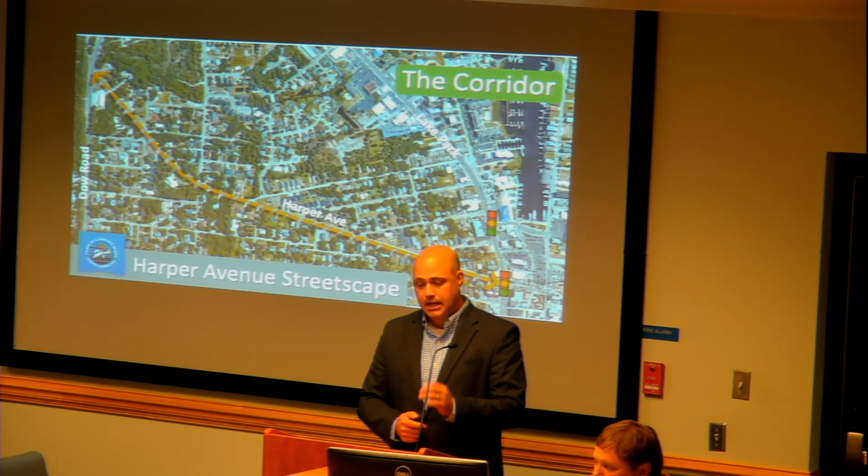So this is current information for those of you who were here on the 15th. The overall corridor, approximately 1 mile in length, has a lot of rich history associated with it, much of which we learned through the design workshop. Those are always valuable for that. Understanding the context, the impact to residents, what this corridor used to be, and what it means to the community is important. So as we go through the street design concept, we've tried to encapsulate a lot of that.

But again, it's 1 mile in length. We've got a right-of-way that varies between 90 and 100 feet. It's posted 35 miles per hour, although I'll add a caveat to that. While it is posted, a lot of people, especially on the western side of the corridor towards Dow Road, really don't drive 35 miles per hour - those speeds get up pretty high. Sidewalks are about a third of the corridor, really more towards Lake Park, and we carry about 1,522 vehicles per day. To give you a perspective, Lake Park carries about 24,000 vehicles per day.

So this corridor, while it has some high speeds through there, it's not carrying a whole lot of volume. So a lot of the recommendations we're going to show you are going to be more based in the pedestrian, bicycle, and aesthetic realm rather than the throughput of traffic.

The capacity on a typical road like that is 15,000 vehicles per day, so you're at 1/10 of that. So anything out here is not necessarily designated because of capacity reasons. There are some issues in the corridor.

We actually had a very good meeting with DOT about this issue. It's been reported to the maintenance engineer. With DOT, they're looking at it.

I think when we showed them some photographs of not only the super elevation, which you can see over here, how the road slopes into this, the depth of the water, and some of the different angles that we had, DOT quickly started to realize, I think we've got a problem here. We need to work with the town, and it's something that we'll probably have a little bit to contribute to relative to the flooding out there.

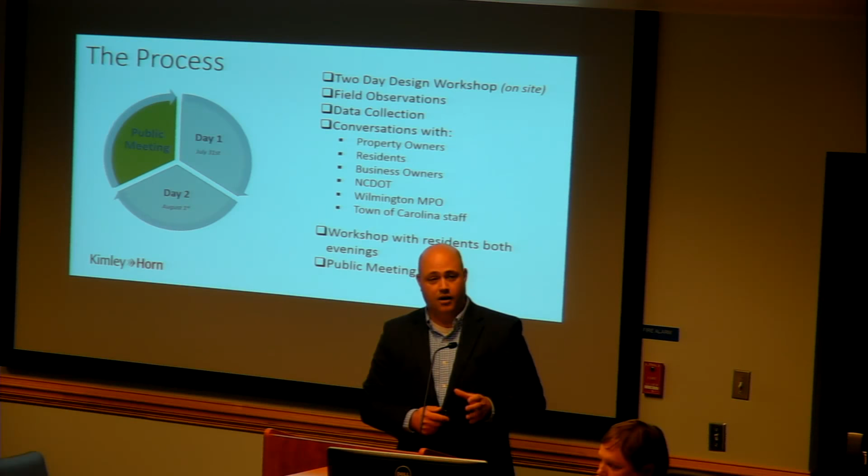So let me share just a little bit about what we heard. If you were here, we had 21 people who came the first night. We did a really cool thing: keypad polling. You got this little device, you didn't get to take home, but you got to push a bunch of numbers on it, and you got to see a lot of different information relative to that. It provided us some wonderful insight on what we needed to know about the corridor and what folks were looking for.

So we had a couple of different vision statements that were developed out of that. Everyone we talked to said Harper Avenue is a unique street. And if you look at a map, as we showed earlier, it is. It cuts across the grain, comes across at a sweeping angle which follows the corridor of the railroad track, but it strikes attention as you look at that corridor.

It's completely different. Somebody made a comment today as I was talking to them at the MPO: it's amazing, you've got 100 feet of right-of-way here, but it's not where you need the right-of-way. You actually need the right-of-way in other places. So you're blessed with that ability to do a lot with a corridor.

And it is a unique corridor in the sense of what it connects. It's really the only connection that you have, that you can make either walking or from a bicycle, that's going to connect the state park, where a lot of people stay when they come visit, and your boardwalk. Most communities don't have the ability to create a greenway that connects those elements, and so it's a very cool street from that.

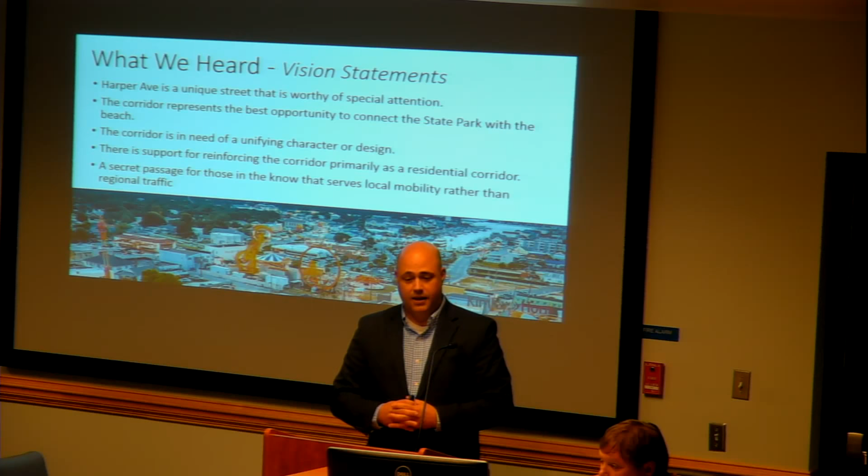It is in definite need of some improvement and a unifying character, and a lot of folks in the community have expressed that. There is strong support for this remaining a residential corridor, even though there's some commercial up towards Lake Park. The majority of it is single-family residential. Will it change? That's for the future to tell us.

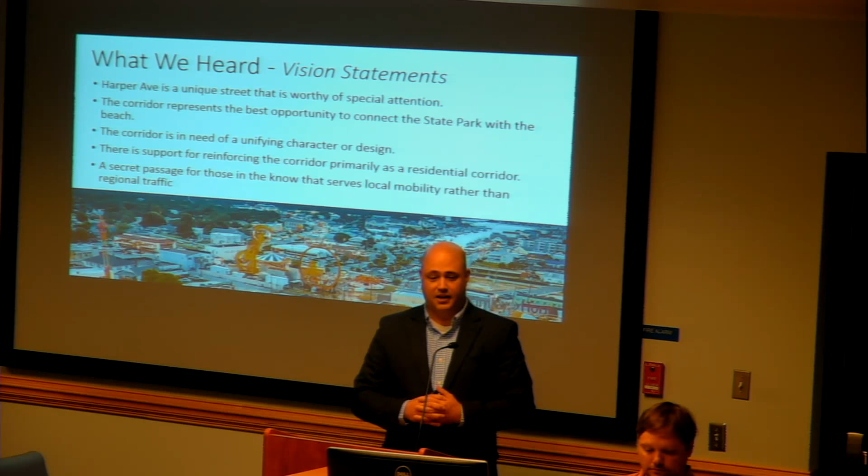And based on the traffic numbers, nobody is using this. It's sort of like the secret passage, if you will. 1,500 people per day using that is a very low number.

Parking was a big issue for folks in the corridor. We need to maintain it. You can see that you've got a combination of hotels and residential rental units, and you've got businesses in the photo up there. You can really see what's going on, that there's a lot of folks, especially in that 200 block. It begins to transition the further north you go, or further west you go, but it does have a parking impact, and people are parking out there today on the grass.

We did make a recommendation that you need to look at a parking study overall. We heard a lot of people say, how many parking spaces do you need? Not really sure, how much does the town need? We don't know. There needs to be a parking study, and I know you've looked at that a little bit, but a town-wide parking study would be key to help answer some of those questions as we begin moving forward.

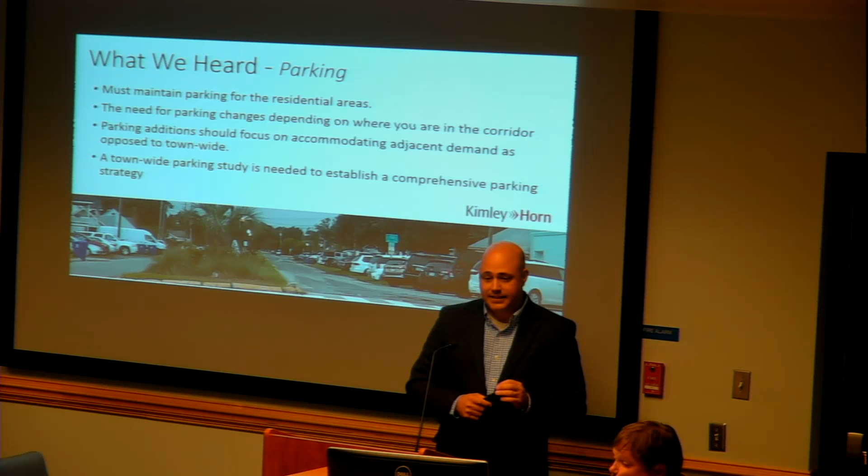Stormwater, that's a no-brainer, especially up at Dow Road, and as you start to come back down, we're starting to see a lot of that. We had a very good discussion last Thursday afternoon with town staff talking about improvements for Phase C, Phase A and Phase B, and how those are tying into this, how we will connect to that to help mitigate.

Where do we see issues? Again, we walk the corridor looking for places where we might need to connect to existing stormwater or amplify that or supplement that. So we're making recommendations moving forward with that.

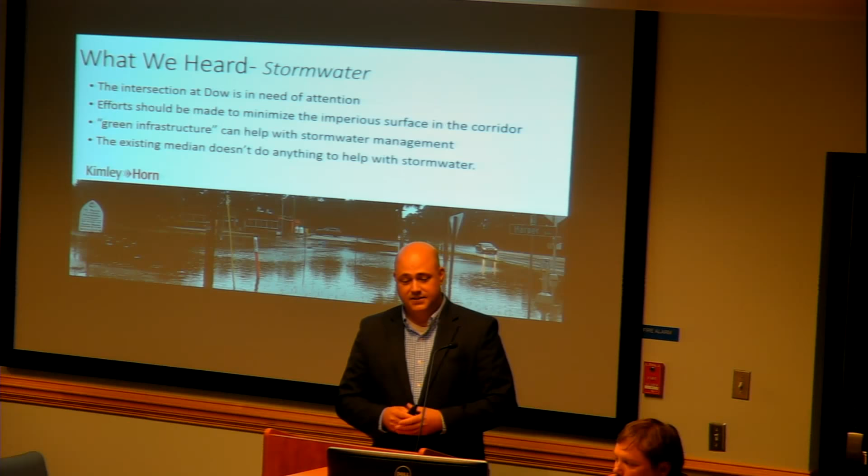And it is important to note that the existing median, as beautiful as it is, or as ugly as it is, depending on your perception, doesn't really do anything for stormwater. Water does not go up a hill and over a curb to get in there. So there's not a benefit for that from a stormwater perspective as we look at it in its current state today.

We heard a lot about green infrastructure, whether it's on the side or in the median. Everyone really likes green in this, and it's a community-wide endeavor, if you will, but it's particularly for this street. Being the only street that I am aware of that actually has a median on the island, it's a unique street. We go back to the design elements, we've talked about that.

We've had conversations, as recently as today, talking about the median. Should we keep it? Should we not? Should the median move to the side? Should it stay in the middle? The concept we've come up with retains it at this point, but in a smaller section, lengthwise for the overall corridor and widthwise. We really feel like there's value to that, and it helps improve the aesthetics of the corridor, or as a green street, not only the green of the avenue, but also the greening of folks walking and bicycling through here.

And bicycle and pedestrian, again, this is really the driving factor through here. I can't say with 100% certainty, but I would say the majority of folks indicated that they are in favor of a multi-use path connecting the corridor from the park down to the boardwalk.

Sidewalks, we heard a lot about this, folks saying, well, I know there's an existing sidewalk out there today in the 200 and 300 block, but I'm not really sure if I walk over there because it looks like someone else's yard. There's no lights over there. It's really close because it's a wide corridor. You see a lot of people walking down the middle of the street because the lights are out there. So those are some things we need to address as we go through this design and move into the overall design.

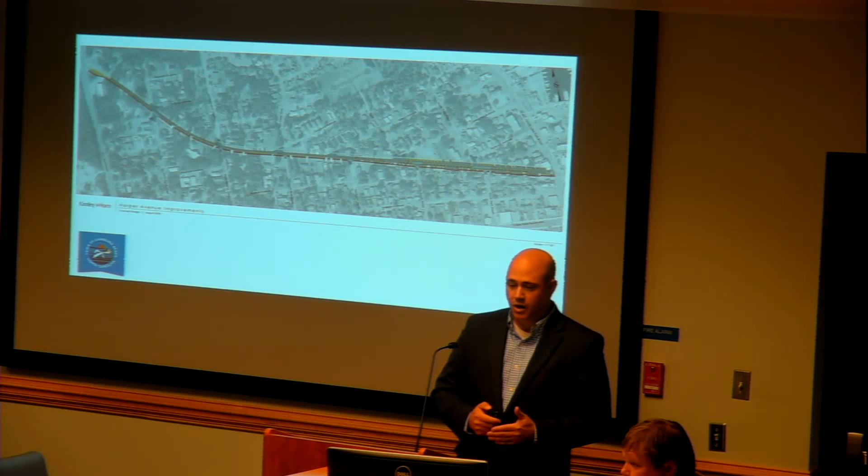So this is the overall concept, updated. I'm going to zoom in on a couple blocks just to show you what I'm talking about. The first one is Lake Park to 4th Street. And if you look up here, one of the things we heard is that folks coming from the boardwalk, as they're coming out here, you'll notice how the configuration of the lanes are today.

You've got a dedicated right turn lane, and you've got a dedicated through left. That's not a typical configuration, and with this readjustment of the street section, one of the things we've done is...

We narrowed this up a little bit. We've narrowed the lanes down. The current lanes are 15 feet, and we've narrowed those down to about 11 feet. The median width is 19 feet today, and we've narrowed that down to about 9 to 10 feet.

We're doing that so that we can bring the overall street elements in and slow traffic down. Hopefully we'd like to repost the speed limit on this section of street to 25 miles per hour. But also, with that, design influences speed.

If I kept the 15-foot travel lanes out there, I can post this at 35 miles per hour or 25 miles per hour, and I'm still going to drive 45 miles per hour. It feels wide. So we've done that.

But as we did that, you'll notice that we've changed the lanes as we come across here. Now it's a through right and a dedicated left, where the median used to come all the way up through here. We've done that so that we can shadow this on the opposite side. If we don't change this, what's going to happen is that through left is now pointing at the through movement coming out.

We've had a conversation with DOT already about this. They agree that that needs to be resolved. There's not a heavy enough volume coming in this right to keep it as an overlap.

When you look at this overlay map and you're at a 100-foot right-of-way, do we have some encroachments into the right-of-way with structures? No. Are we right up on the line on some of them? No, we're actually trying to move the impact in. One of the surprises we've shown people in the past is that we're actually zero lot line construction on a build-to on some of these older properties.

The new ice cream place on the corner, is he right on the line? We haven't got that far into it to go and survey each one of the obstructions that are there.

In those locations, we try to work around that as best we can. One other question at this point, the angled parking you've got here in the first block or so, how deep, what's the depth of those spaces? 18 feet, 20 feet? It's approximately 18 feet.

I know the feedback we've gotten is our change on Cape Fear has made it very crowded, and when you have any normal size or larger vehicle getting in and out of those parking spaces on Cape Fear, it's very dangerous right there at Lake and Cape Fear. I know you guys have all heard those comments, right? When people park a big truck, it is right there, and I just want to make sure we don't repeat that same constriction.

Great point, and you'll notice if you look at the screen, we pulled the parking back. That was one of the things that came out of our public meeting, that over at Cape Fear and Lake it's really close, you could have a car backing out, and sometimes it's backing into Lake. So we've pulled the parking back from Lake, which is over here, Lake Park, so you don't have that interference with the intersection.

You don't have the interference with the pedestrian either. Basically, as you're coming off of Lake Park and you turn to go on Harper, you've gone through the maneuver and you're driving straight before you would interact with another vehicle. That helps with sight distance at the signal, it helps with pedestrians crossing, and it helps with overall safety of vehicles moving in and out of that area.

The fact that we also have a 100-foot right-of-way in that area and we're narrowing up the median should give us enough room to expand the parking areas, so the vehicles parked there don't lap over into the travel lane like they do on Cape Fear. We've seen that on several occasions where somebody pulls in a big truck and it's sticking way out into the street. You could narrow the median a little more and play with those numbers to make sure this particular area doesn't have that problem.

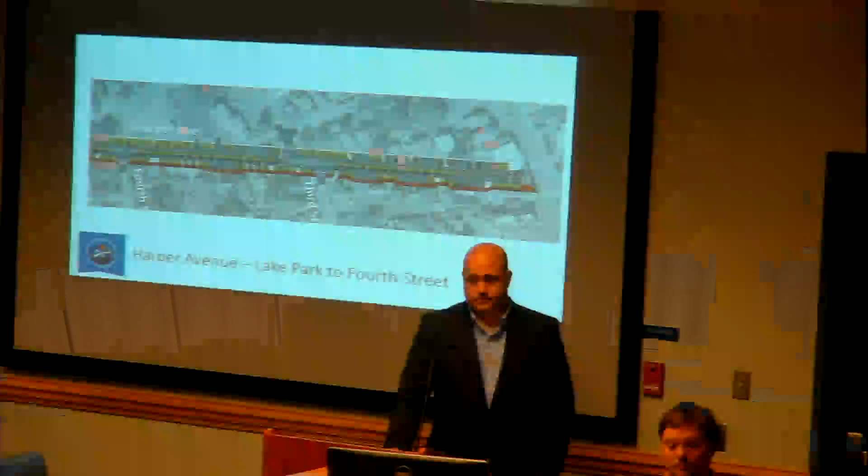Steve, what do you mean by your second question there, in regards to that line you're addressing with the ice cream shop? Well, when you look at that green box that comes right up on it, and that curve, being somewhat familiar with that intersection, his building's right up on that. So I'd be interested to see when this gets to scale, how close it gets to it.

Once it's surveyed, you're still maintaining a sidewalk in there. So the green doesn't go all the way up, and there's an additional sidewalk area that's kind of pulled out to the concrete. So this is going to change, this just gives an overall representation of the area.

You could do cafe seating out there, you could do sidewalk, you could just keep it open as it is. It helps that corner out because this is somewhat of a blind corner. As you come out here, it's very tight between the front door and where you're going to try to cross the crosswalk.

In the detailed design here, this crosswalk is actually pulled over a little bit more than where it is currently today, so that you're not all standing on the same corner. You've got more room for maneuverability. We've shortened that too, so it's not running the longer lane than it was currently, and we've reduced some time at risk.

We have a little bit more of a unique design that we're implementing on some of these approaches for the overall crosswalk look and feel. Some of the other elements give a nod back to the railroad — you'll notice some stamped paving and laid out areas through there. It's either stamped concrete or stamped asphalt, but it brings that element, gives you the illusion of the former railroad tracks, which is why we scaled this down.

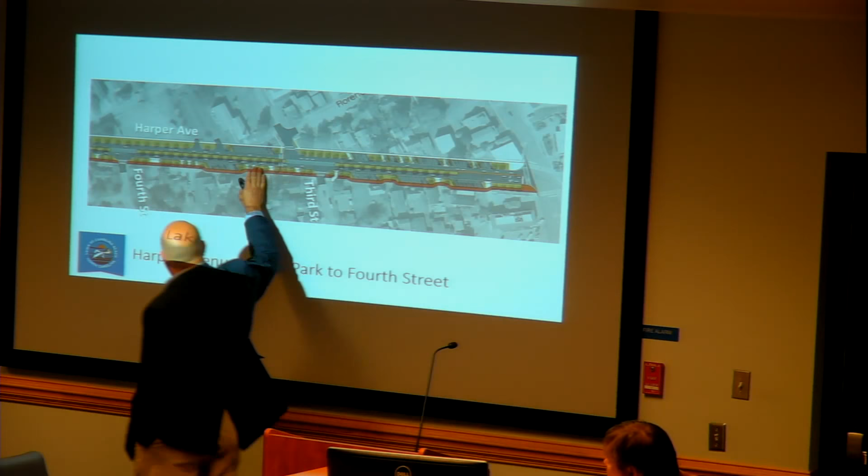We have provided a little bit of additional parking over here. One of the conversations we've had in the sub process was with the church here, St. Paul, and what they indicated is that this location is the Florence transition, and then they're taking that street out. That's a really convoluted little triangular intersection here — you've got this connection over here, and you really don't need that section of Florence Street.

Remove that, and in turn, when you have vehicles that line up right through here, you can get through. We brought back some additional parking through here. The church is really kind of the linchpin of where we see two additional parking spots on the street. With that moving, you get...

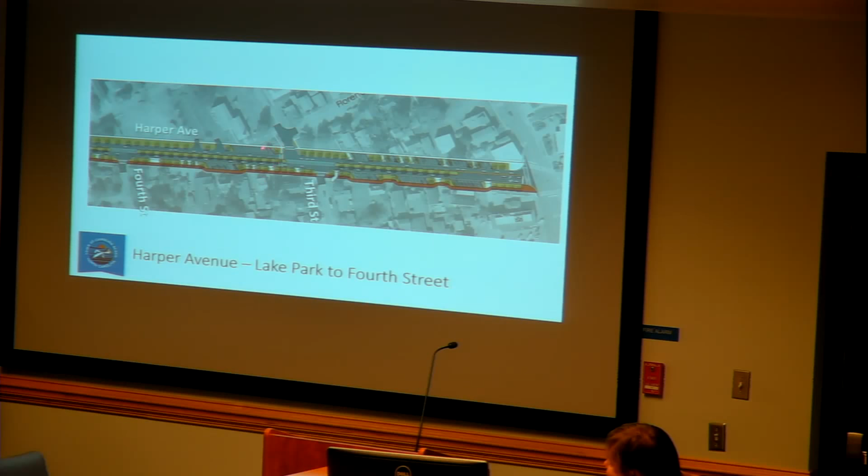Question: the terracotta color there on the bottom — is that the possibility of a multi-use path? Answer: Yes, multi-use path. It's a 10-foot multi-use path. Thank you.

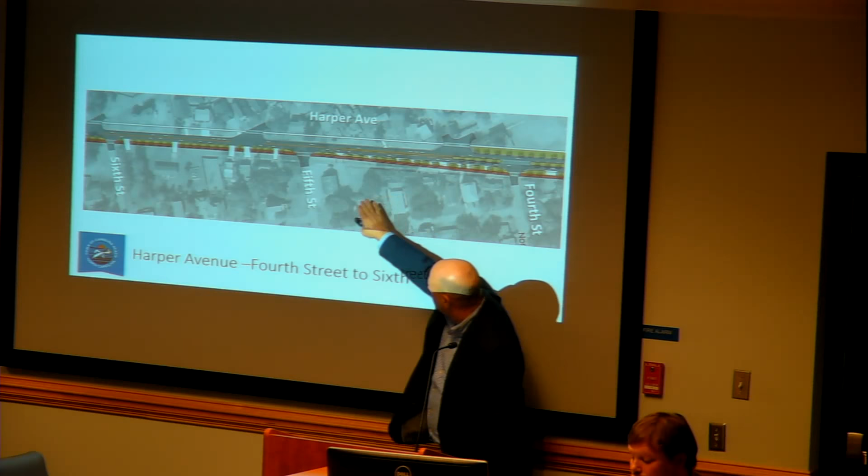We've added those in, of course, at the driveways. This squiggly line you can see right here — to orient you, this is where the current Masonic Lodge is — but this squiggly line that runs across right here, that's where the current sidewalk is. So that gives you a perspective of how this section is starting to come in and get smaller. The impacts to property owners through here are starting to diminish as we move forward. We're taking that right of way further in, so there's no further impact.

As we take a more global look, you can see this is the rest of the corridor — a very similar, typical section. You can see the overall multi-use path separated by a planting strip, and then a two-lane section, much smaller lanes than what's out there currently today. The impact is going to be very negligible.

These folks right through here, where the sidewalk extension is, there's going to be an encroachment there — not inside or beyond the right of way, but there's going to be a sidewalk in front of your house where there's currently not one today.

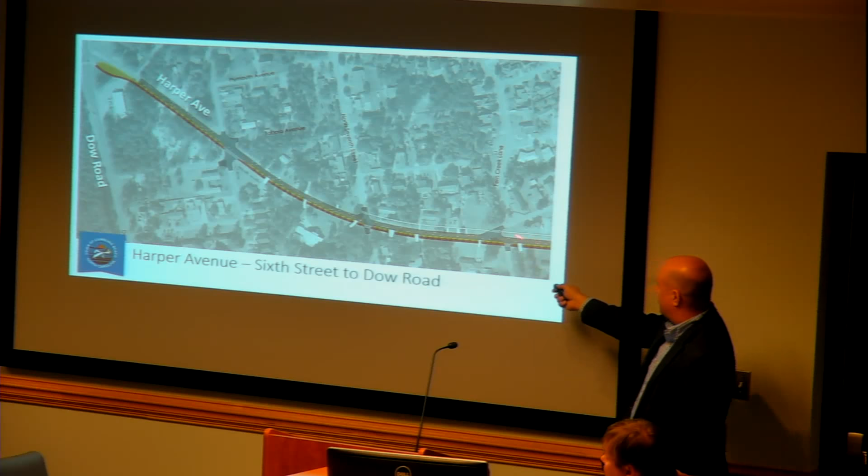So there will be a little bit right through there, through that section. But overall, that sidewalk gets you all the way up to 6th Street at that point.

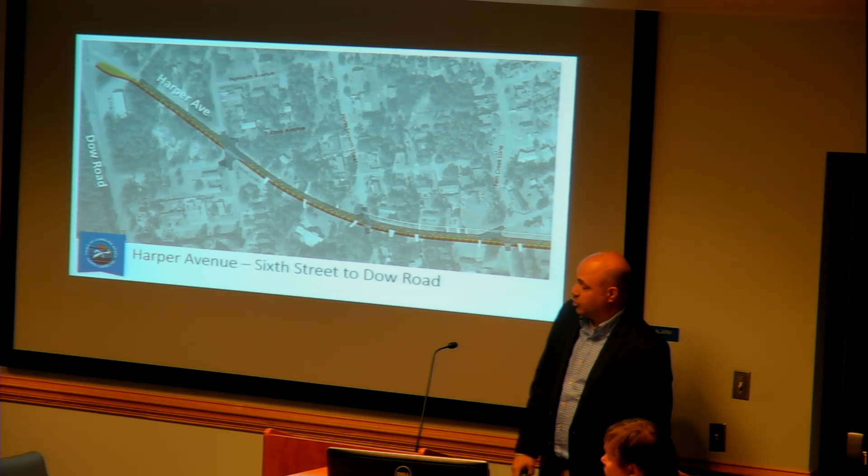We had several questions about why we chose the south side. A lot of that has to do with where the current crossing of the Greenway is up at Dow Road, the right of way, and where it takes you down through there. Crossing that over or moving that or changing that becomes more expensive. Plus the angle at which Harper comes into Dow Road makes it more unique and more difficult to switch if we were going to. So we continued with that section.

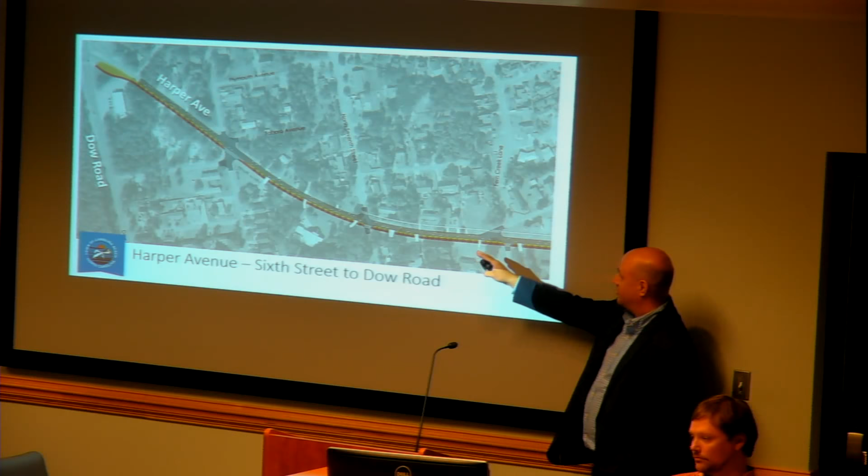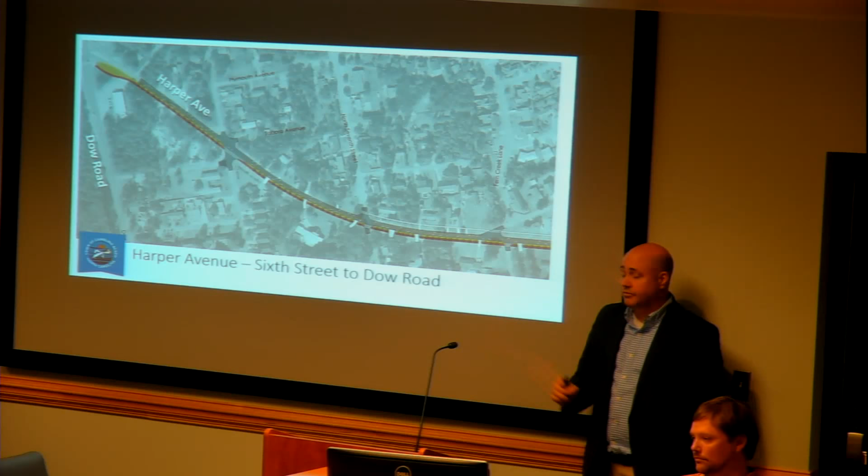Plus it impacts, overall, and folks may not see that, it impacts actually to your property. Because you've got a large swath through here and some other locations where per home you don't have as many impacts. So that's a very quick overview of where we are today and the concept design. I'm happy to entertain any questions or comments at this time.

The only other comment I had was about golf cart parking. We talked a lot about maximizing that down towards Lake Park. Personally, I'm not sure with the golf carts if they wouldn't prefer to park closer in, but we just don't seem to have a lot of golf carts. So someone had mentioned to me, could we take one whole section and make 10 or 12 golf cart spots? At some point, we seem to be increasing the number of golf carts.

On our roads. One of the difficulties, if you look at that Lake Park to 4th Street section, is the two commercial areas right down there next to Lake Park take up the space that would be prime for golf carts. Their businesses have to have full-size parking spaces. The farther out you get, more in front of people's houses.

So we can see what we can do. Keep in mind that we do have the golf cart parking passes, so you can park in any parking space if you have a golf cart parking pass. So it doesn't have to be a full size or a small size.

Right, and I think what Steve was trying to get at, and we had discussed this, is how can we park more golf carts and maximize those spaces? Yeah, 2 in a space or whatever.

Just one thing, Jonathan. It's kind of hard to tell based on the scale, although I do have some sense of encroachment. How close would you estimate the multi-use path gets, or if you walked it, did you have some sense of how close that multi-use path would get to some of the homes on the south side of it?

In most locations through here, if you're looking at your sidewalk, it's going to move about a foot towards the road from where the back sidewalk is currently, so it's going to move away from the home. Currently there's a sidewalk there that's right on the property line, is that what you're getting at? Right. Yes. So I'm just looking for a net gain or reduction. Okay.

Some locations there's a foot of right of way behind the sidewalk, some locations there's not. We're going through all the deed research to determine that, but on average it's going to move about a foot from where the back of the current sidewalk is towards the street, so you're gonna gain a little bit of space there.

I know it's very sensitive, there's some really beautiful homes through here with some really nice little walls that have been created, so we're trying to address that. We're trying to move it in locations where we can away from those. The last thing we want to do is encroach on that or have someone step off their sidewalk or front stoop right into the side path. That's not a good situation.

One of the things I'd be interested in, obviously where you've got the parking, you need the sidewalk so they're not walking on the grass. But as we get closer to Dow Road, I'd be interested in maybe not having the sidewalk on the north side to save some money, since it's only got 1,522 cars per day. Certainly they can get over to the multi-use path and still have plenty of movement. So I'd be really interested in the cost estimates.

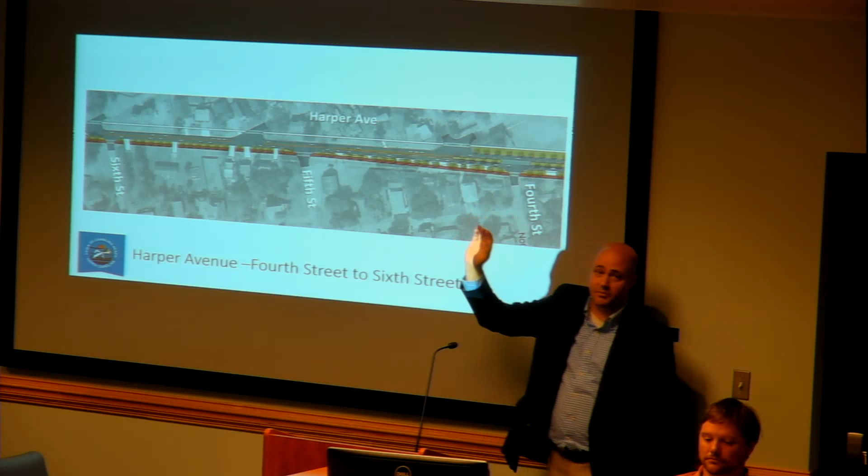Some of it had to do with where some of the infrastructure was coming up from Phase C improvements, where there are some sidewalks that are kind of coming up and stopping, leading you to a point of nowhere. So what we would need to do in those locations is look at how we could connect across to make sure they can get over to the side path so that they're not walking in the street as they are today. As long as we address that, I think we can.

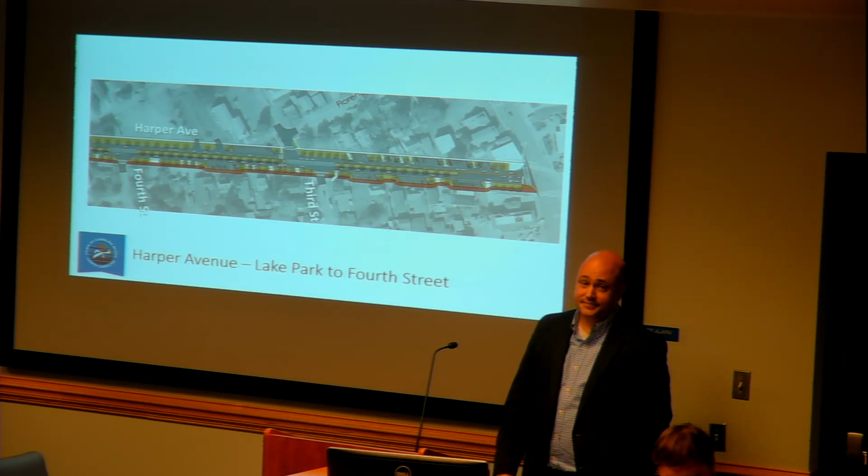Your parking goes to what block? We stop about midway through Fourth Street, so beyond that we wouldn't necessarily need that northern sidewalk. Currently it does go all the way up here today, we've got sidewalk up to 4 feet. But you're gonna tear it out anyway to improve that, so we don't necessarily have to put it back.

Plant native plants, save money. Yeah, Michael, I just have a question.

I know now that people are parking basically in the grass, and nobody's gonna pull up in their yard and park and go to the boardwalk. But when we put parking places there, are you having complaints on the other streets where you have residential signage? Are people, the general public, parking in those places or not?

We do get some sporadic issues, mostly on the nights where we have fireworks, but it's not quite as extensive the rest of the time. I'd say we've had maybe 3 or 4 over the entire season where someone says, hey, I came home and someone's parking in this spot, and at that point we send out parking enforcement officers. Typically on those 3 or 4 we've had, the car's been moved before we even get there.

Would the homeowner be able to call to have someone towed from their spot? Yes, basically the homeowner can't request a tow company come in and tow because it's our property, but they call us, and yes, if we have to tow, then that's what we do.

There's some very good space up here for bicycle parking. You got a lot of green space up there. It's not a location I really want to put a whole lot of parking because you're getting into the Lake Park intersection. Bicycle parking, certainly put some stands up there. We could even do a covered shelter if you needed to. You've got a lot of options associated with the hardscaping for bicycle trails.

Slow electric vehicles, that's one of those trade-offs. If that's something the town thinks we need to look at, we can certainly address that, and try to create some parking spaces if that's something you feel like we need to address.

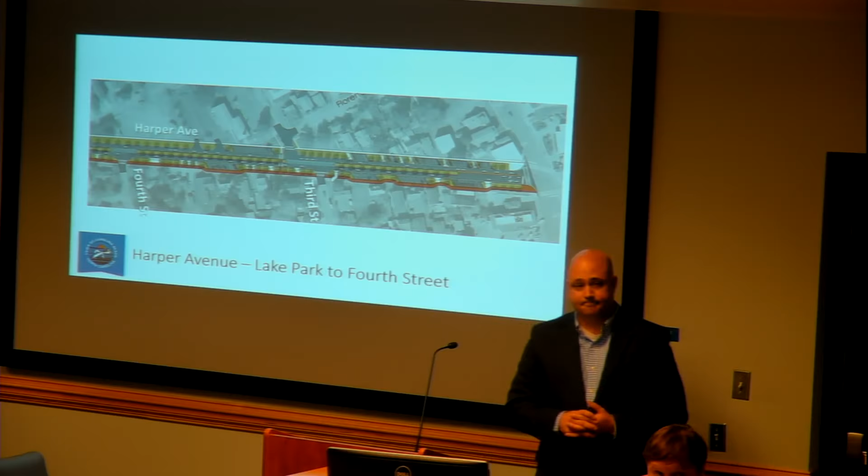I guess my overall comments and thoughts are, I like the plan. I really like keeping the median. I understand why we have to do away with it there at the intersection, but it is really kind of a unique feature to the community to have that divided median. It's just a really neat feel. It gives us part of that small town feel. So personally, I'm really glad to see that stay.

I'm all for a 10-foot multi-use path. I understand why it's at 10 feet. The MPO has educated me on that, but I can tell you the feedback we got from a lot of people in the community was 10 feet was a lot wider than we needed. I'm just putting that out there. So we're going to have some education on why we're doing another 10-foot multi-use path.

And I would like at some point to get some tape measures and some stakes out there on that first block and a half or so and show where the right-of-way is, and actually maybe put out some cones and look at parking. We did that on Cape Fear when we were talking about doing parking in the median, and we brought the fire truck down, we parked trucks on both sides, and when we got there we looked and said there's just not room for center parking in the median, and we still ended up with those parking spaces that are problematic. So I think a visual demonstration on the ground with equipment, seeing exactly how that GMC truck can sit in that parking space and allow someone to back out, and just so that it's functional. I would just want to make sure on the ground it's functional.

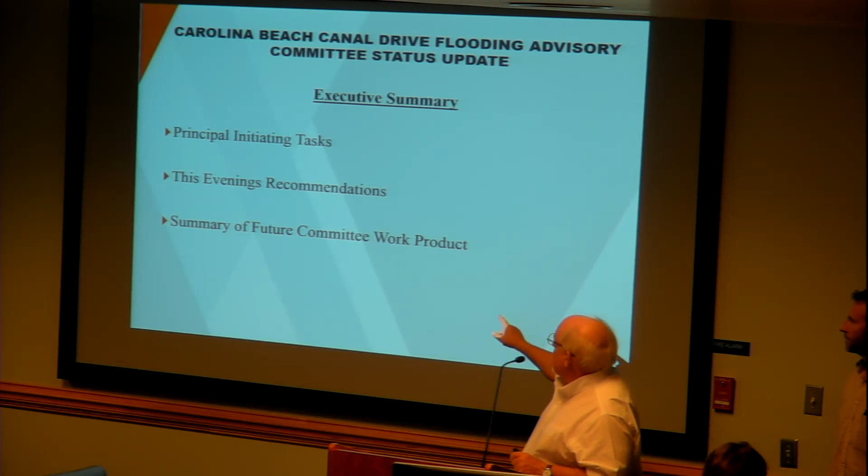What we'd like to do this evening is break our presentation into three elements. One is our principal initiating task, asking for the okay to proceed with recommendations we're making tonight. We'll go over why we're here making these recommendations, then Adam will present the technical and financial elements. Thirdly, since we've been meeting since May with our sixth meeting coming in September, I want to give you an idea of what's shaping up and what work product to expect from us in the future.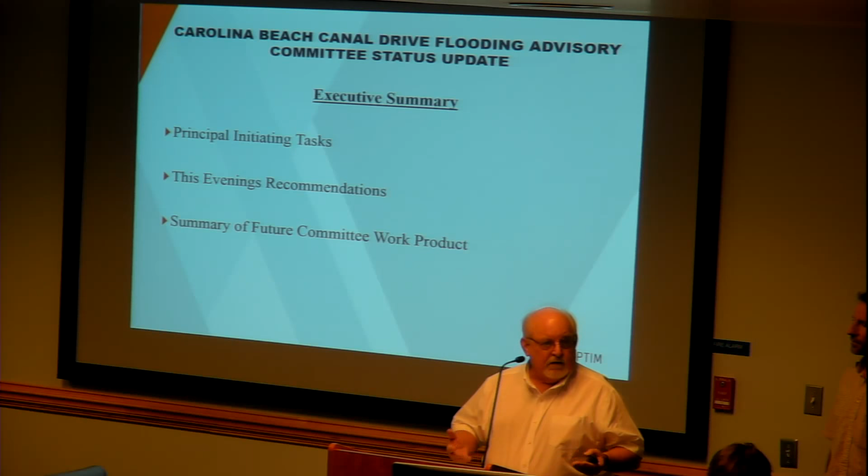The principal initiating task, when we first looked at the ordinance and the improvements out here, was the design elevation for any future improvements. The elevation being used right now is 4.7 feet MSL. That is an empirical determination—the town marina is using that elevation. It's the elevation that has not been exceeded by normal weather or tidal conditions over an extended period of time.

However, the committee felt that because this will be an element built into a future ordinance, we needed a number that was scientifically defendable. That number will be generated by a combination of factors: sea level rise by tide over the last 70 years has been approximately 1 foot in this area. The projection is that it will be about the same for the next 70 years, plus an unknown factor associated with global warming. So we'd like to make recommendations for that elevation incorporating all these elements.

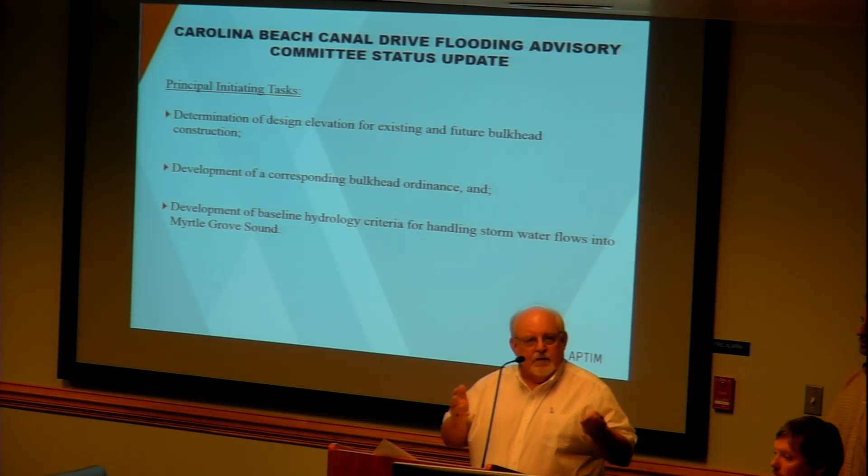So the objective here, in addition to measuring our water surface level given these special conditions, is to have a framework for a reasonable risk analysis on the elevations we finally settle on. That risk analysis will be analogous to a Q10, Q25, Q100 storm event, reflecting the risk the town wishes to assume—a combination of safety factors plus economic factors.

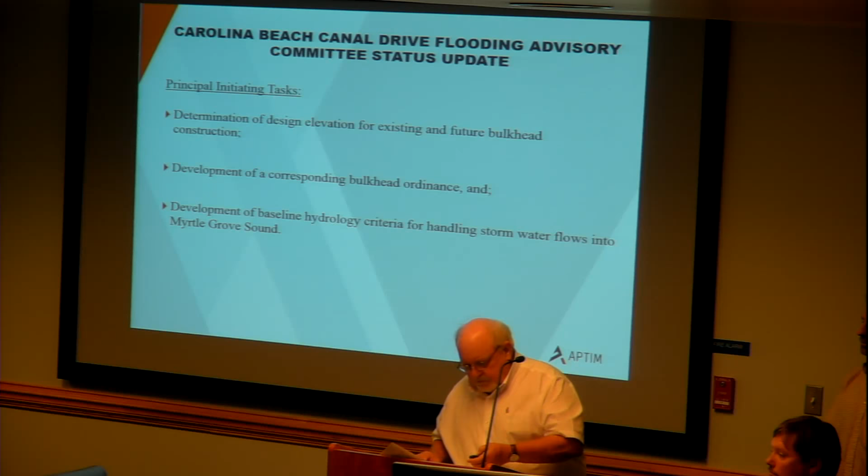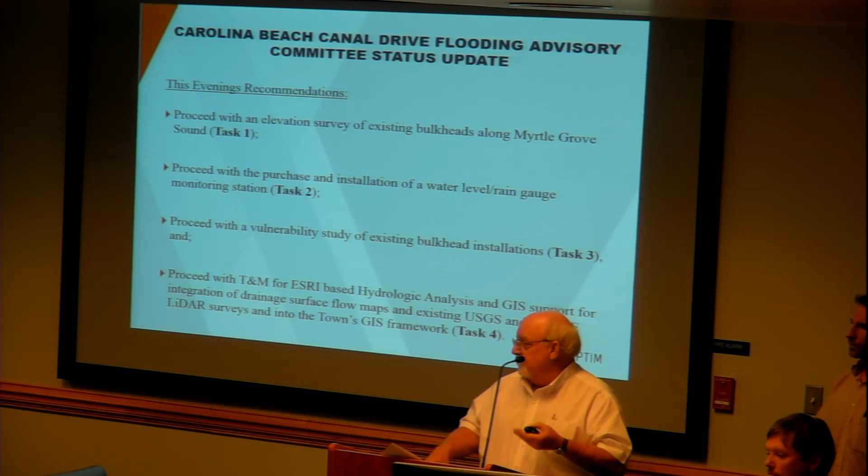As for what the town has done so far, the committee feels the town has done a stellar job planning for this. Issues working in the field right now with local flooding: about half of the intersections are already equipped with check valves, which have made a material difference in the amount and elevation of water coming up. The town is also dedicating $80,000 a year for specific maintenance on Canal Drive—cleaning sand out and making sure pizza boxes aren't on the storm grates and items like that.

One of the drivers here, in conjunction with that, is the bulkhead project for the intersections. That's one of the drivers behind the ordinance, so we'll have a target elevation for the public improvements we're going to do at each intersection.

The north end improvements are kind of the future that we were seeing for similar type of improvements on Canal Drive, and that would be new storm drains and a pump system to take the water out.

So task one, and these tasks reflect the contract proposal that APTIM has given us, so we've got direct one-to-one correspondence. Task one is an elevation survey for the existing bulkheads. This will be lot-specific, so we know exactly what's required at any individual lot once we do task three, which is a vulnerability study.

Task three, the vulnerability study—excuse me for stepping ahead here. This is not an assessment of how good or serviceable the bulkheads are at this point. This vulnerability has to do with how it's going to work in conjunction with the neighboring bulkheads as far as the elevations go, and to keep the tidal water from coming in.

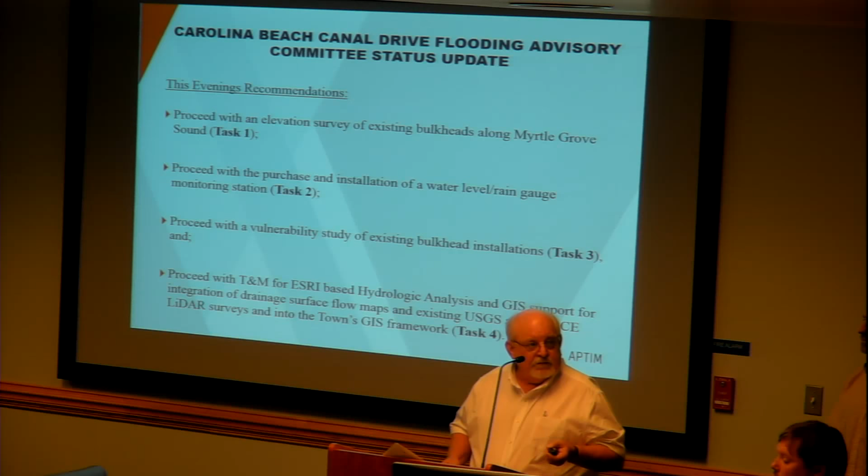Okay. I just thought I'd ask because I know. I thought you knew everything. Yeah, I did know what it was, I just knew you didn't. Thanks, I'm not afraid to ask. I can ask for directions, yeah, there we go.

I'm quite all right. So that's on a T&M basis too, because it'll bring in—like I said, Adam's going to go over each one of these. So that's what we're asking for tonight, and the rationale behind it.

In the future, this is what you're going to see coming from the committee. One is the bulkhead ordinance itself. At this particular point in time, we're in full draft status. It is in review at the staff level. We're ascertaining where we need to go with interagency review, and then we'd like to come back and present the bulkhead ordinance as a standalone workshop item for town council consideration in a month or two, probably two months.

Then the other item which is big on the resident side is traffic control, and we're also looking to Steve for the water situation up on Carolina Beach Avenue North. But for the traffic circulation recommendations, I'd like to say we're really fortunate to have Gil Dubois as our staff representative, because there's direct interface. So if someone comes to the committee with a traffic concern, we can express it to the committee, and it goes right to the operational portion of the town for resolution.

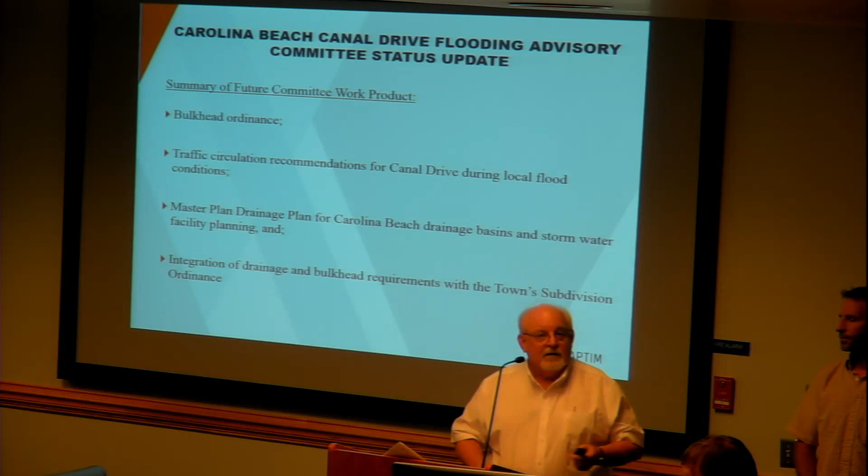So with that in mind, our primary objective tonight is to get the initiating studies in operation, order out and install the equipment, and start the assessment process. So with that, I'd like to turn it over to Adam, and he'll go over the technical elements of it here. Thank you.

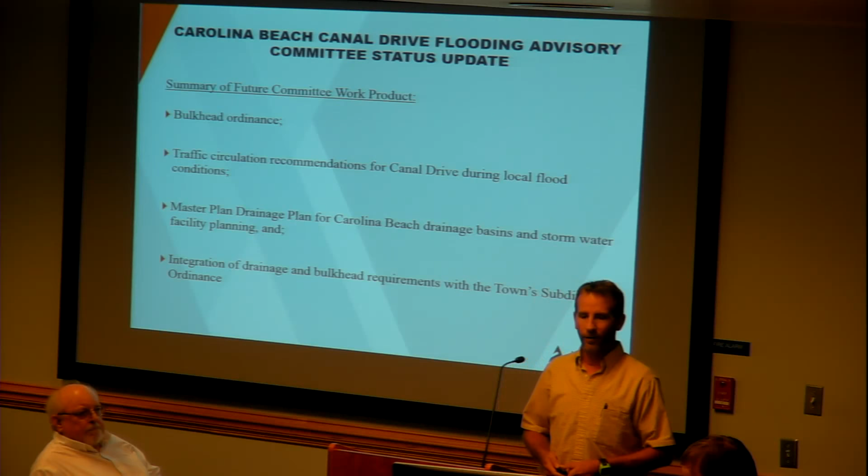Good evening, council. Thank you for taking the time to have us talk tonight. So as Dale mentioned, I'm going to go through just some of the technical aspects, but I wanted to give you a brief introduction of who APTIM is.

I know it's hard to say - APTIM is a big company, but the group that I work for is a core group that used to be called Coastal Planning and Engineering. Over a couple years, we've been acquired by a couple different companies, and the name has changed. That core group hasn't changed, and that group includes engineers, geologists, biologists, oceanographers, environmental scientists. You name it, we take projects from cradle to grave, and this gives you a little background of the different things that we do: coastal marine engineering, the geosciences, which involves surveying on land and in the water, and also natural resources, environmental studies, investigations, environmental impact assessments. We do all that stuff in-house.

So just want to give you an idea of who we are. We're not civil engineers doing civil works projects. We're coastal scientists, coastal engineers, coastal biologists that deal with coastal issues.

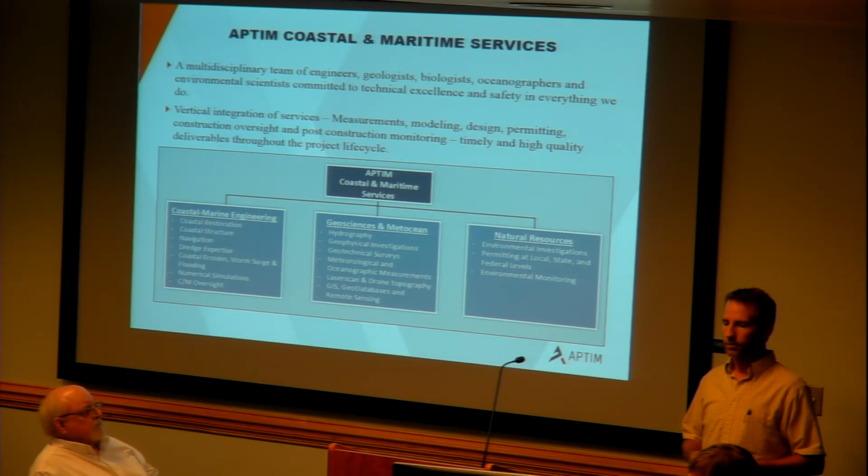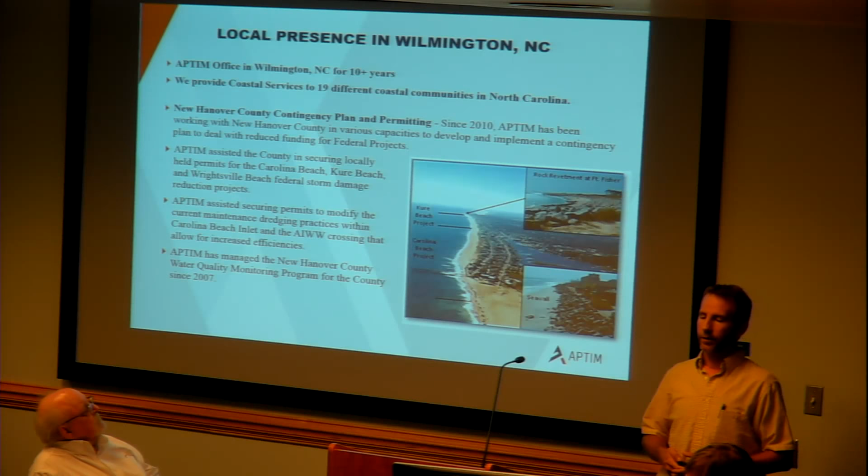And also, just so you know, here in Wilmington, we've had an office for 10 plus years. So we're right down the road. I actually live here in Carolina Beach, I've been here for about 4 years. Our office in particular in North Carolina, we've dealt with over 19 different coastal communities, dealing with beach renourishment, contingency planning, as you can see here with New Hanover County, doing environmental impact assessments. We also do water quality monitoring for New Hanover County. So we do have a local presence, and we do work in this area.

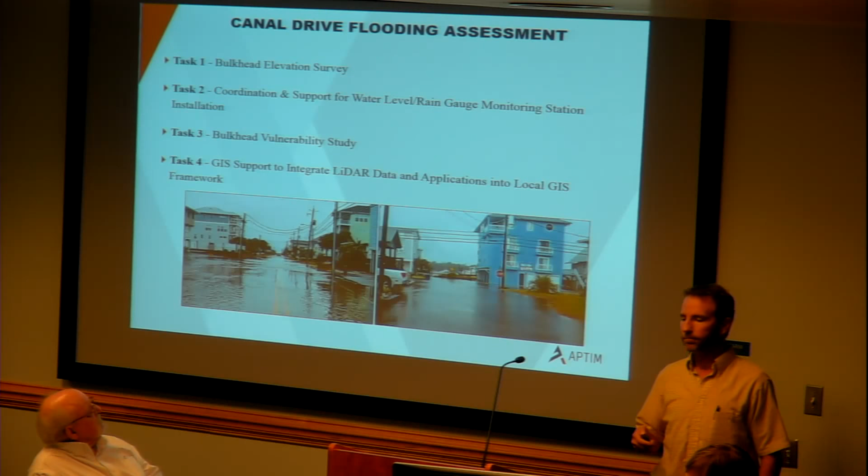This gives you the summary of what Dale outlined in the beginning. These give the 4 tasks: the bulkhead survey, the coordination that we would do, along with having the contractor that would provide and install the monitoring station. I'll go over the bulkhead vulnerability study and some points in there, and then also the task for the GIS support for the LiDAR, and then all the other information put together.

This is also another good screen, it's got a lot of good information on it. This is just a breakdown of the existing funding. The estimated costs here were provided in a proposal to the town a while back, and this gives you those ballpark numbers. We have submitted an updated proposal to Mr. Kramer, he has that information, but this just gives you an idea of what kind of dollar amount is associated with these tasks, and then the total estimated for the work.

Adam, yes sir, let me interject here, just so council's aware. During our budget discussions, this was one of the items that was added into the budget for stormwater - the $65,000 for overall study for this project. So it's already something that is built into the budget. This isn't something that's an additional ask.

Could you explain - we've got, if I'm correct Jeremy, that they installed a tide monitoring at the marina, but this probably is going to be a higher level.

Yeah, this one would be a lot more sophisticated than I figured for that price. It is more sophisticated. The gauges out there now are tide gauges, and they are physically monitored - a person goes out and takes a photograph of it, and that's how it comes through. This, and Adam's gonna go through it, would this be located in the same place?

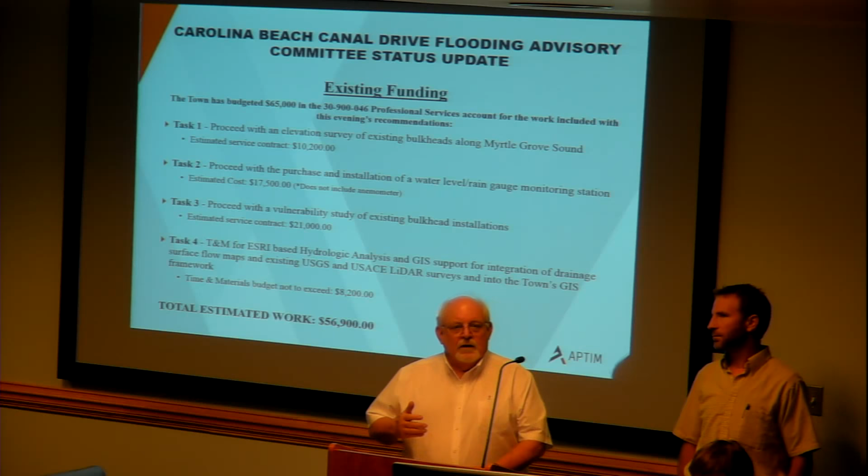It may be. We're thinking right now about doing it out at Oyster, where one of the new king tide gauges is located. Exactly, we're thinking of the same thing. They do need to be protected, and located in a place where they're not susceptible to wake from tide coming through and that kind of stuff.

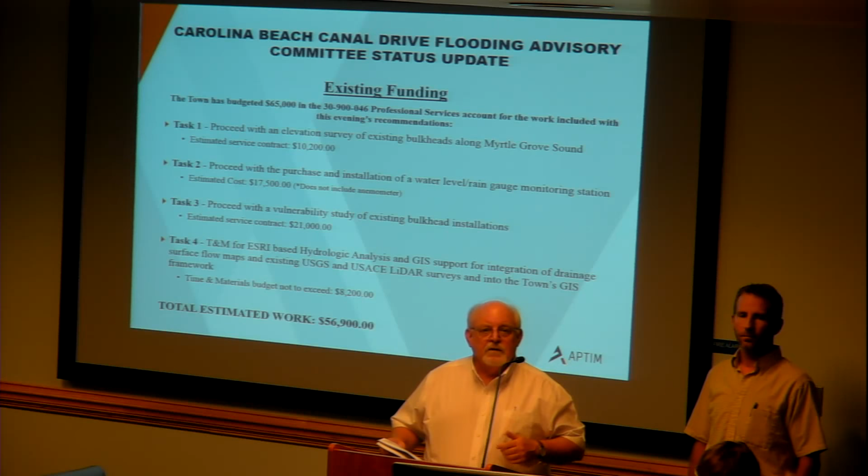But yes, this is a more sophisticated, real-time monitoring system, and it includes the rain, because we're going to have to correlate the rain with the tide to some degree. It obviously won't be exact, but we need to correlate it. So it'll electronically transfer this information somewhere - that is correct. And the monitoring is going to be pretty easy.

No problem at all. Question for you, Adam - on task number 2, it says does not include anemometer. What's the rough cost on that?

So the anemometer - just to give you some background, this system is based on what the state uses for their water level monitoring stations. I spoke with David Furlong with the North Carolina Department of Emergency Management, and this system will be essentially what the state uses. So in the early discussions, the station only included the tide gauge, or water level sensor, and the rain gauge. At the meeting last week, we talked about adding an anemometer.

The anemometer - you can actually get what they call a multi-parameter sensor. This includes the anemometer, but it can also include a barometer, temp gauge. So it ranges from $1,000 to $3,000 depending on the suite of sensors that come with it. Much of the reason for the anemometer is just to substantiate what we already know to be true, and that is to correlate northeast winds with the highest water.

So that's what's going to come out in the study. We discussed that two weeks ago. That's rather inevitable, you're correct. Ooh, Weatherman Joe.

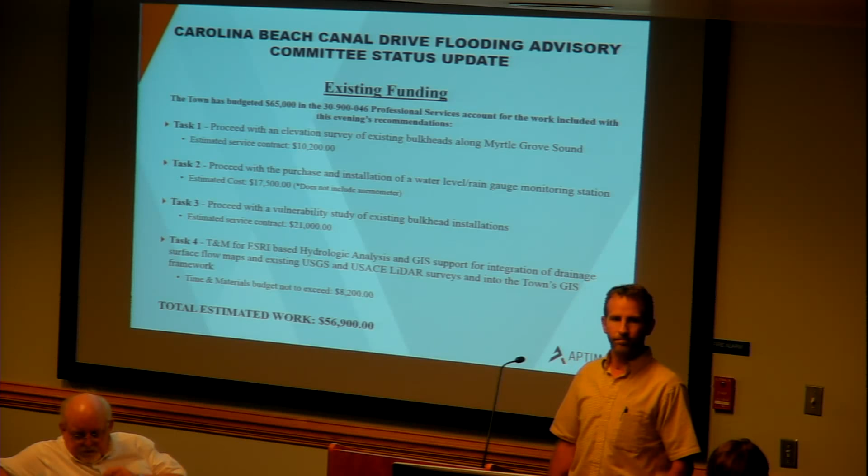Yeah, I've got some more slides that go into a little more detail about the system. So, just to go into a bit more about the bulkhead survey - it is what it is, it's actually a physical survey of each of the segments of the bulkheads along Canal Drive. You can see here, starting where the winter boats are, and going north all the way down Florida Avenue.

I forget what the street is there that we cut it off at - Delaware. We'll be able to get top of bulkhead elevations along each segment at every property along here.

There was some discussion about whether to do it by land or by boat because of people's properties. We do have a flat bottom aluminum skiff that we take out at high tide and try to get everything we can by boat, so we don't have to interfere with everybody's property.

But however we do it, we'll be able to go through and get top of bulkhead elevations. We'll also survey the rim elevations on the stormwater outfalls and the drainage basins or catch basins, so we get actual hard data on all those features to know where they're located. We'll be using RTK GPS relative to the NAVD88, which is the standard datum for surveys. But that can be translated to any other datum, as Dale mentioned - the mean sea level that the elevation is right now for the bulkhead.

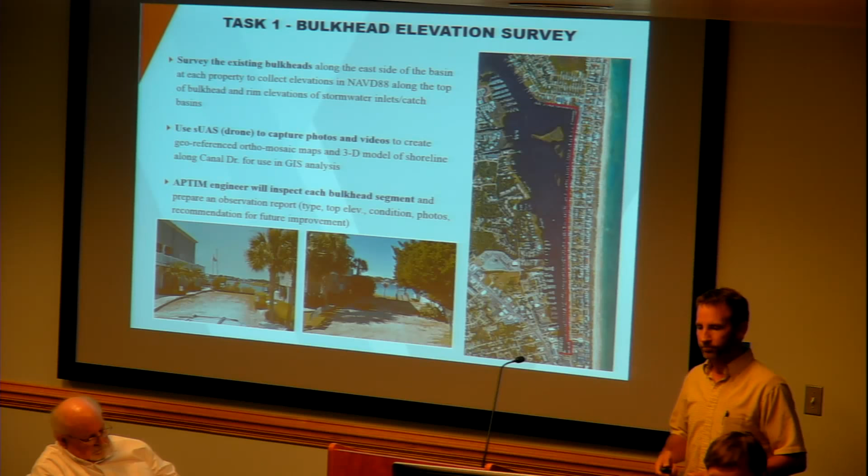Task 2 is the information regarding the monitoring station. As I mentioned before, this is very similar, if not identical, to what the state uses. I think there are 540 locations throughout the state where they monitor water levels. There's one at Johnny Mercer Pier, which is a similar system. They're putting a few more in near Oak Island and Ocean Isle Beach currently.

As you can see, it gives you some information. It's a radar water level sensor. There are essentially two types of water level sensors: the pressure sensor, which actually goes in the water, and the change in height of water above the pressure sensor gives you an idea of what that water level is. This one is out of the water, so you don't have to worry about fouling, growth, or maintenance. The maintenance is less, but it's highly accurate, and if it can be located in a good area, it can provide really good data.

So this box here will house the power supply and also the cellular modem. All the information will be sent via the cellular modem and antenna to a cloud-based service run by the state called Contrail. That's basically the state's depository for all this data, and the town would have access to Contrail to look at the data and record and save it over the long term. The contractor that's spoken to works for the state, and they would provide and install all the equipment. The only thing missing shown here is the rain gauge.

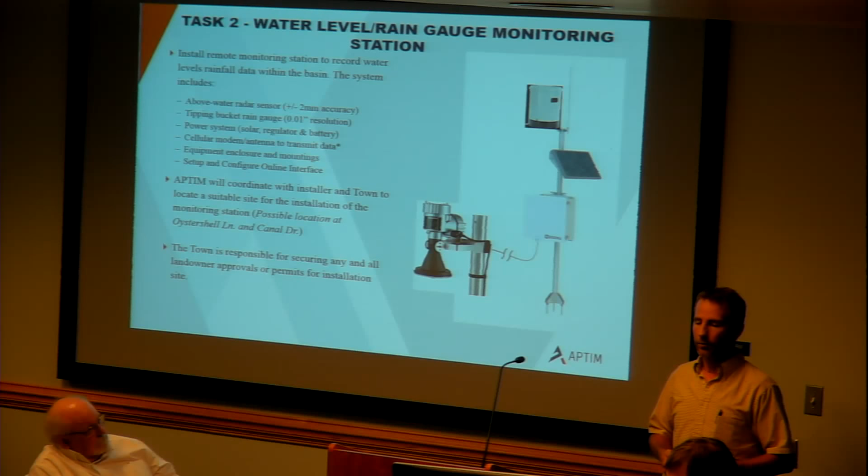If you put them too close to the south end and you get a hard wind, you're going to get higher water levels than you would at the north end. So we're trying to find a place where we're capturing an even water level within the basin, so we know what's going on in there. The town would be responsible for any and all landowner approvals or permits for the installation. That's why we're thinking if it's a town property and town site, it would make it a lot easier.

This shows an example of what the data would look like once it's transmitted to Contrail. The state takes the information from Contrail and sends it to this flood inundation mapping and alert network, the FIMAN site. All this would be done for free. This is a service the state does, but they have a water level monitoring station, and they also send the data to the National Weather Service.

There's another page similar to this that would show the data over time as it's changing within the basin, what it would look like. It also gives you indications of different levels, which would be determined through Task 3, the vulnerability study, but it shows you where the water level is in relation to the study.

There's also an additional item in the proposal to have a dedicated web page for the data. Now, the public, anybody, is able to get this data from the FIMAN site. You can go there, you can go to Johnny Mercer Pier, and the town could have a link to that site where anyone from the town could go and look at it. But the dedicated web page, shown here at the bottom, could be generated so that graphic could be on a town web page somewhere for people to go to and look at.

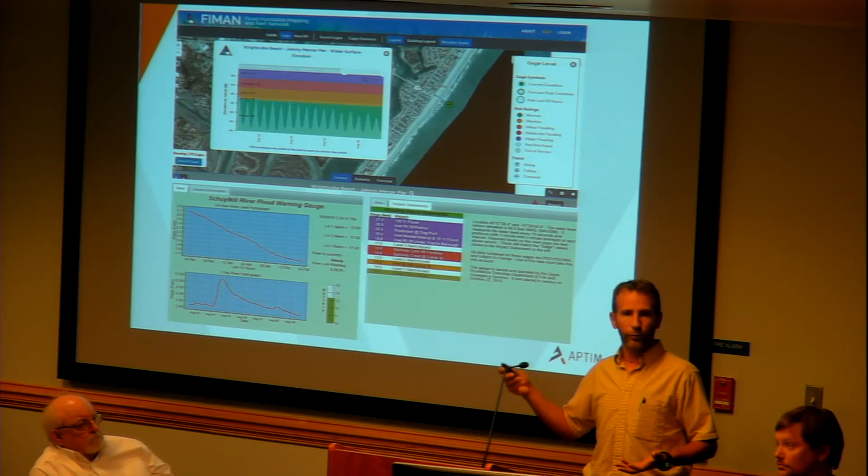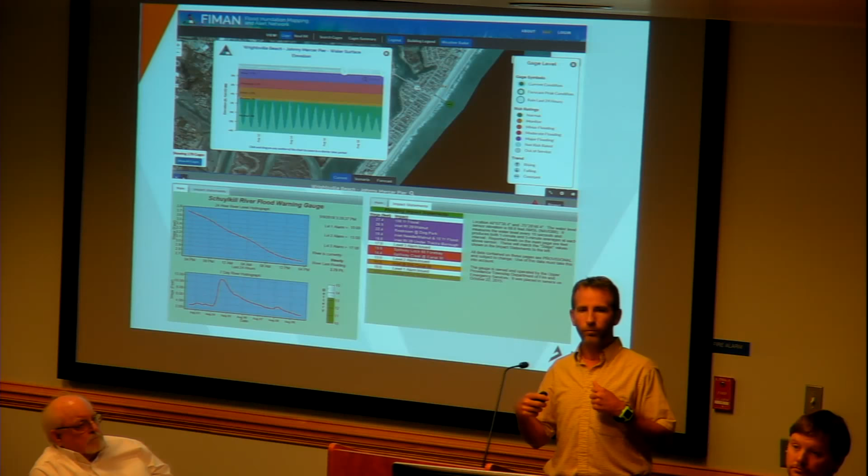So you also have these rain gauges as well that would tell you, and then you'd be able to correlate some of those rain events—okay, we had a rain event, but we had a low tide, what were the impacts? You'll be able to start putting those pieces of the puzzle together and seeing, when we have these events, where the flooding is occurring. But this just gives you an idea of what the data would look like, what you'd be able to see when you went to the site in real time.

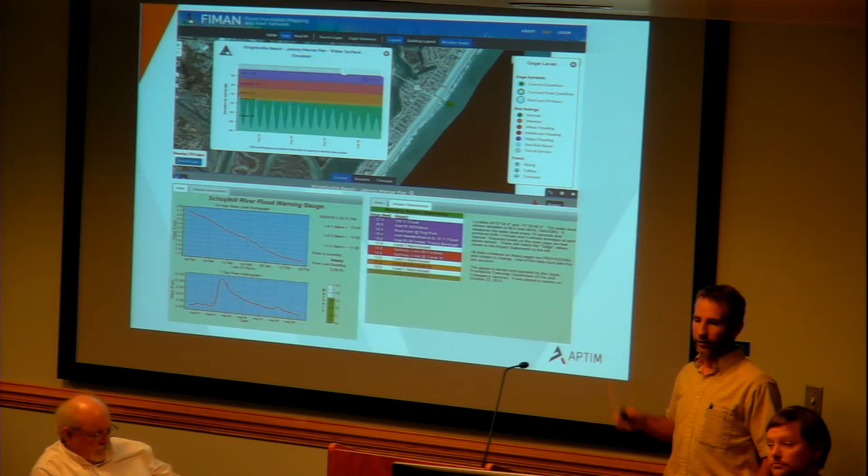And this is another task that, as Dale mentioned, is called the Bulkhead Vulnerability Study, but it's not actually talking about the bulkheads. It's looking at the water levels and how the bulkhead would be vulnerable to different return intervals, as he mentioned—a 5-year storm, a 25-year storm, a 50-year storm, a 100-year storm.

So under this task we perform what we call an extremal analysis, basically looking at the water level data, looking at the high water events, and then scaling out and coming up with these return intervals. We look at the water level data, climate data, and sea level rise modeling data that NOAA and the Army Corps already have out, and pull all this information together, and from that give it to the committee, to the town, to use in determining what the minimum bulkhead height or elevation should be.

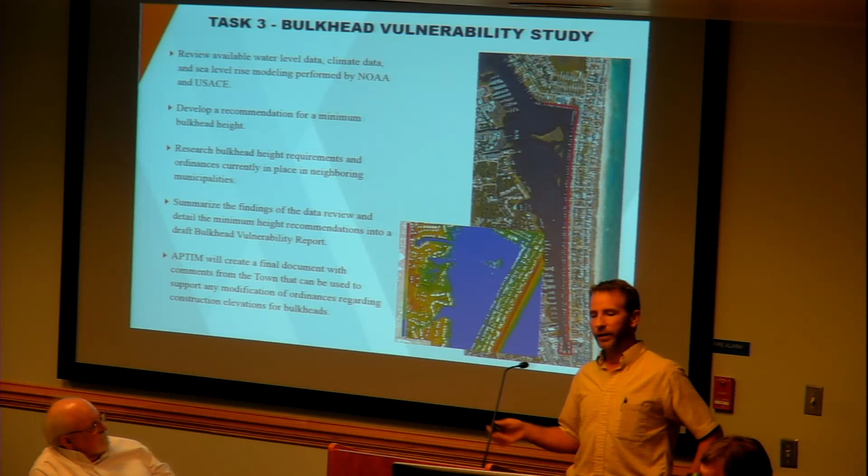It'll provide that number, but then the town will take into account other factors than just what this study will be—but there'll be a report. We actually have LIDAR data back from 2015 that we'll be able to incorporate. It's basically taking in all the historical data, looking at it, and seeing how the water level has changed over the years to provide the backup to this bulkhead height.

You don't want to have a height and elevation that's, not say arbitrary, but this will provide an engineering analysis and engineering backup, hard data to why that elevation is where it is. So if somebody questions it, you can say, well, it's based on this, and then you can go from there.

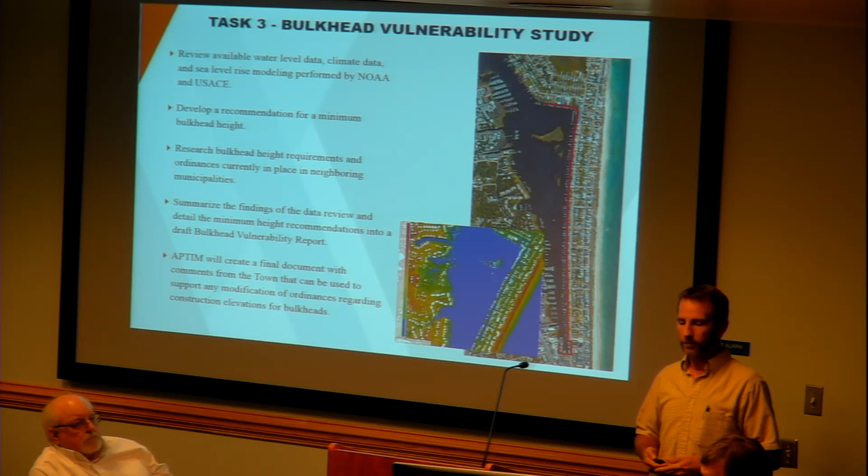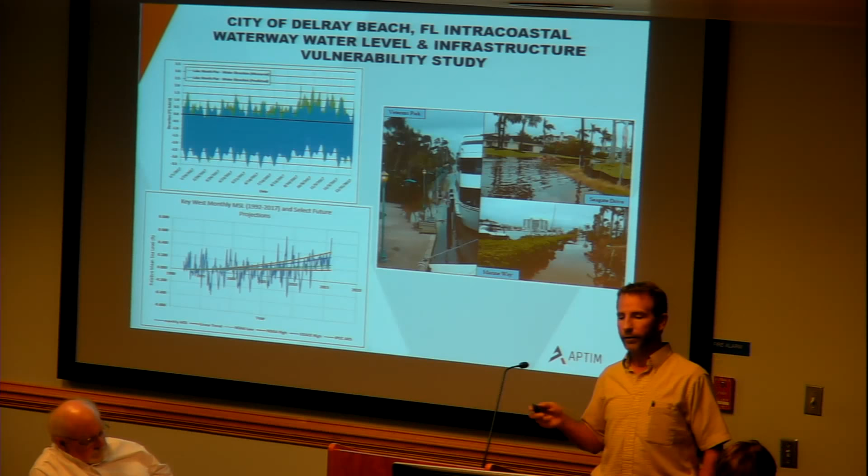We've recently done one of these studies for the city of Delray, and this just shows you an example of the historic record for the water levels and the sea level rise they're dealing with down south. As you can see, some of these pictures almost look like Canal Drive in Carolina Beach. Their study was on a much larger scale—I think they had something like 2,000 miles of canals they were looking at and incorporating. But scaling that down to Carolina Beach and Canal Drive, it's the same process, just looking at information geared towards this area. This is something we've done, and we're looking to do for Carolina Beach.

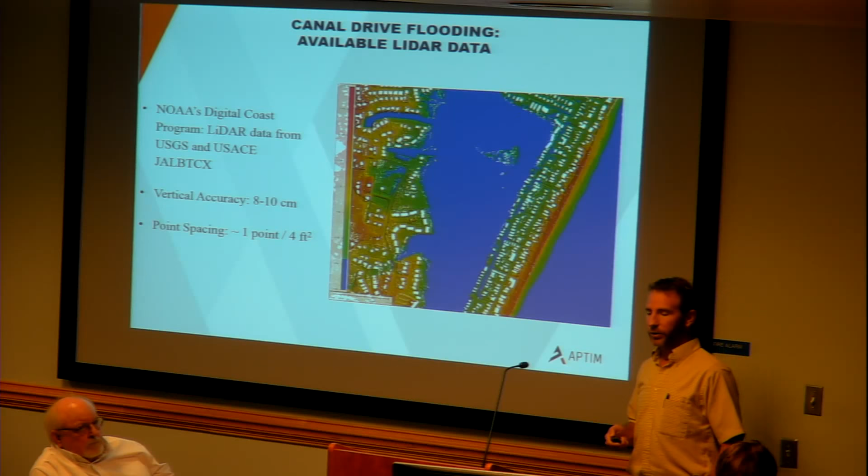Just to look at what the area is already like and see where the drainage is already occurring, the sinks, the low points—you can see they're already pinpointed, and we can look at that information in much greater detail. That information will be brought in. Task 4 will involve working with the town to identify those problem areas.

This task involves conducting what we call a surface flow drainage analysis. It's a hydrologic analysis that shows where the water is flowing—say if we have a rainfall event, where does that rainfall go within the limits of Canal Drive and that section. It will be used to identify high-risk areas. As you can see from the last slide, at each intersection you have low points, and we may be able to identify additional areas that could be turned into outfalls, another place to get water out of the road or area faster.

This will basically take the information that's readily available, run the ESRI hydrologic analysis, and use the drone data and elevation data, pulling it all together and giving it to the town. They'll have a tool to analyze what's going on. Operations can look at it, help fine-tune the information, and if they know about an area that's having issues, they can go address it and look at it directly.

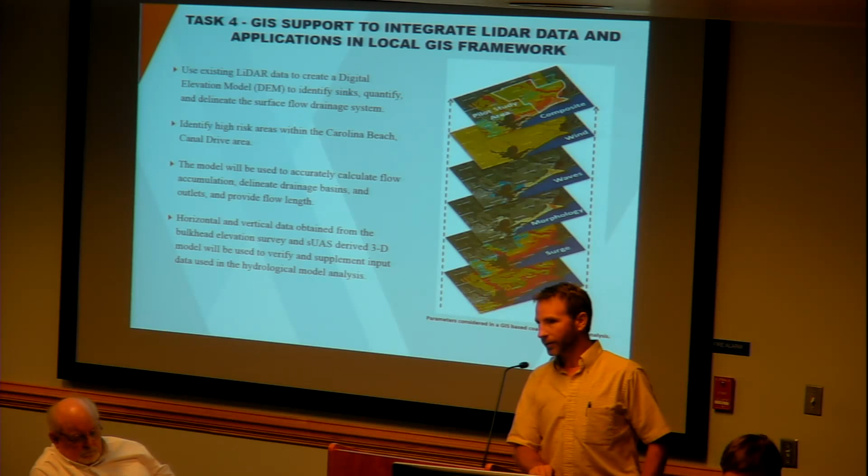This would all go through the town's GIS. They would end up training Gigi on how to use the tools in ESRI that she uses now for our GIS, to be able to use this model, and we can do it basically on our own once we have the system identified and set up.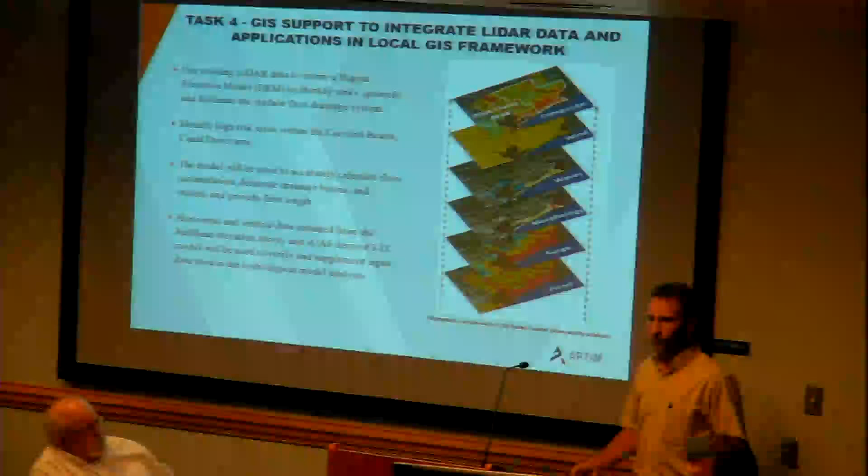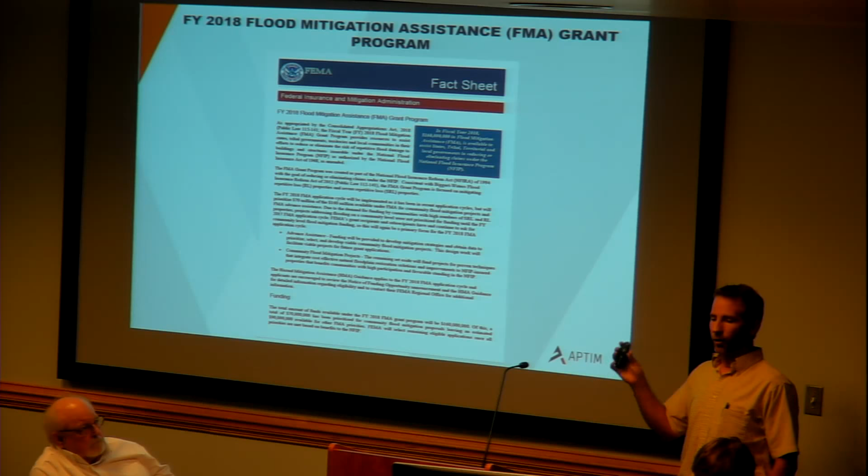A lot of what we're talking about doing relates directly to some of these FEMA grant programs. This is a change from the existing grant programs Jeremy manages now, where we're elevating houses. FEMA has changed their granting structure so that not only can we raise houses with the funds, but we can also put money toward infrastructure improvements. So, for instance, if we determine through this study we need bulkheads at the end of every street, that would be a qualifying grant-eligible item we could put in for.

The mayor and I met with Chance Lambreth and members of the committee to make sure Jeremy's plugged in on this, so we could start working on more than just the houses, look at a larger grant. We also talked about needing to be sponsored by one application at the state or a mitigating agency—is that right? Yes. I'd like to also suggest that the studies we're likely to recommend are also eligible for that same grant program.

That would make great sense if we could try and do that. All right, just a few more slides here. I think just going back to summary slides to show you what I've gone through, and just to show you where we're at.

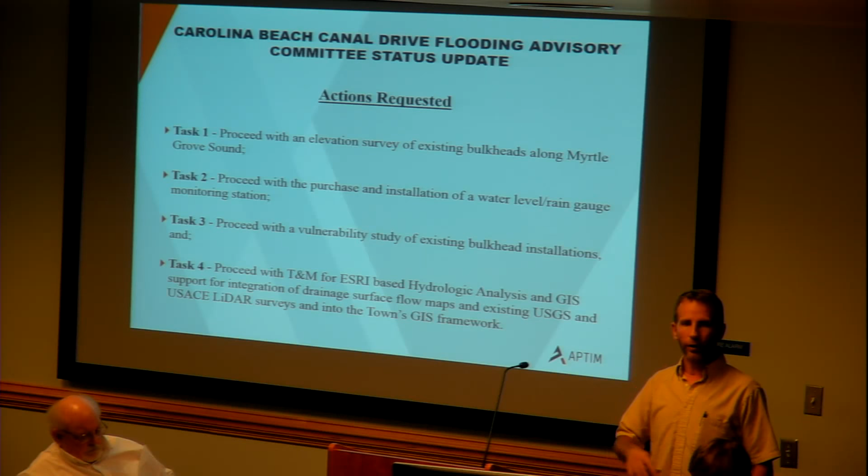Again, the 4 tasks: the elevation survey, the purchase and installation of the monitoring station with the water level sensor, rain gauge, and anemometer, the vulnerability study to assist in determining the minimum bulkhead elevation, and the time and materials task for performing the hydrologic analysis, and working with town staff to have that system incorporated for future use. These same 2 slides you've seen give you background again on the existing funding and estimated costs.

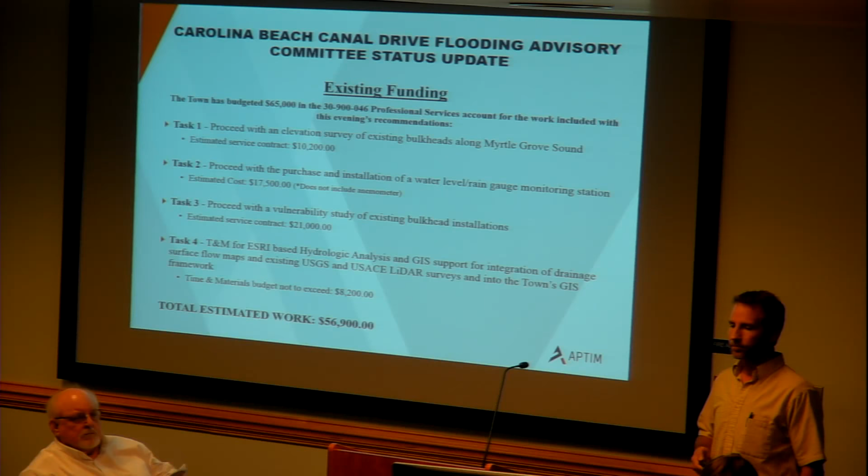That's it. Thank you. Anybody have questions? Dale and Adam, we have talked about the specificity required for the pre-disaster mitigation grant. There are 2 criteria: infrastructure at or below 4.5 million, and at or above. That'd be useful when we select or recommend a sized bulkhead.

There'll be a price associated with that, which would then go into the grant the grant writer would submit. I don't think the survey will be finished soon - it wasn't at the last meeting. The canal survey - we got an update today that Bob Jones should be getting us a partial survey by the end of the week, and then they'll be finishing the rest. That's the latest information I had from today.

Okay. Then we've already talked about the ordinance and getting the town attorney to do a sanity scrub before taking it outside of the municipal. That's all I have. Appreciate you guys.

That was very good. Thank you. Thank you, Dale and Adam. They're doing great work for those that live on the canal and anywhere near, putting together some outstanding products. Thank you, Dale and team.

Council, given the fact that I'm not hearing any concerns about moving forward with the program, the signature and authority for the contract is something I can routinely handle. It's in the budget, below the budgeted amount, in the 65 budget. So if you don't mind, we're going to move forward with the project and keep collecting information. No objections? Rock and roll - that's what you gotta do.